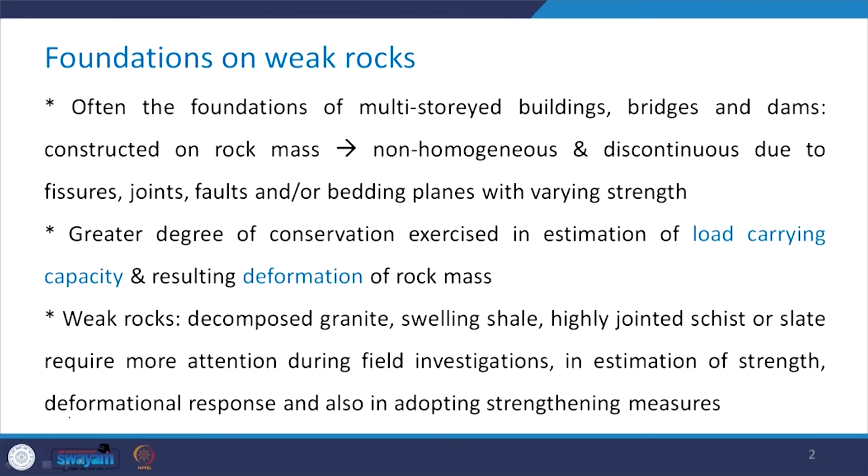Weak rocks can include decomposed granites, swelling shale, highly jointed schist or slate, and such types of weak rocks require more attention during field investigations in the estimation of their strength and deformational response, and also in adopting the strengthening measures.

Generally, bearing capacity of rocks is more than that of soils. So when I write here that bearing capacity of rocks is more than that of soil, that means I am talking about the bearing capacity of the foundations on rocks. They are more than the bearing capacity of the foundations on soils.

Compressive strength of this intact rock varies from 1 MPa to more than 200 MPa, and we have seen such things in detail in some of the earlier chapters of this course. You all know that due to presence of defects in rock mass, the compressive strength and the modulus of the rock mass is much less as compared to that of the intact rock.

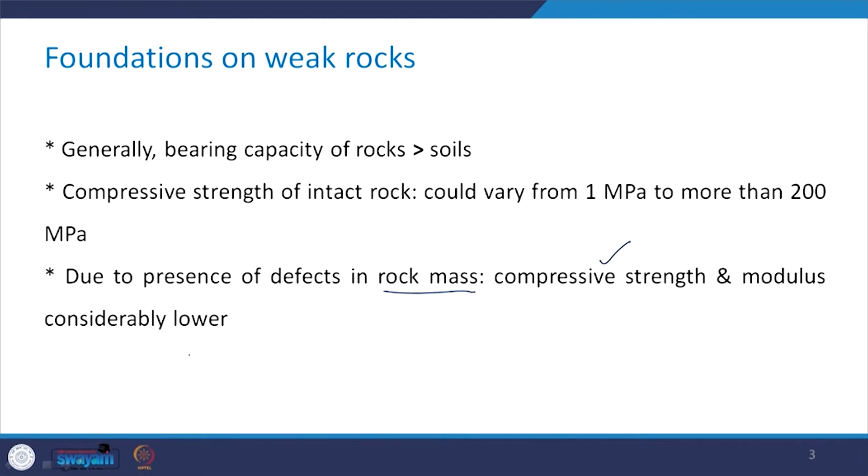Compressive loads from these structures, whether vertical or inclined or horizontal, have to be transmitted to the rock mass through individual spread footing or strip footing or mat foundation, or it can be caisson or pile shaft and its tip.

Suspension bridges, strengthening of dams, and in order to take care of uplift pressures in deep mat foundations for buildings in dry docks, these tensile loads are applied to the rock through anchors.

So you see that all the compressive loads are to be transmitted to the rock mass through these individual footings, which can be shallow footings or deep footings. However, in such cases where you have to take care of uplift pressures in strengthening dams or suspension bridges, tensile loads are applied to the rock through anchors.

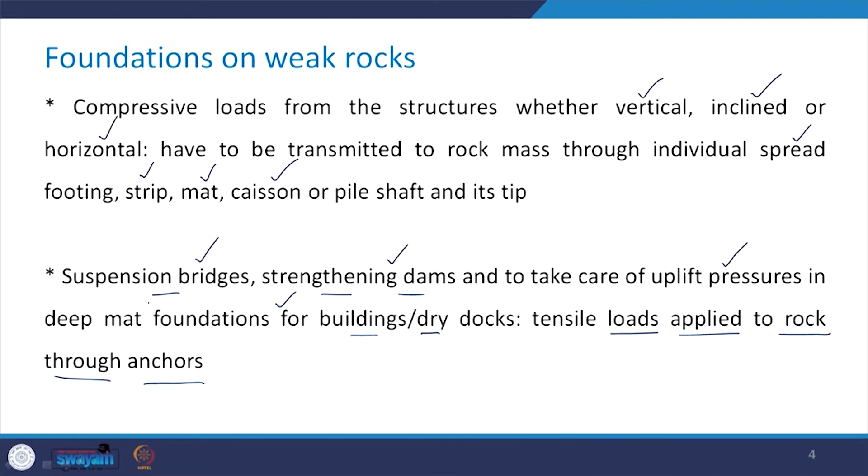Now, when the spacing of the joints is very wide, and by very wide spacing we mean spacing which is more than 5 times the loaded width, in such cases the bearing capacity of the individual footing or the pile tip can be estimated as that of an intact rock using the classical theories which we have in case of soils.

However, in case of heavily fractured rock with close spacing of joints—so you see in the previous case you had very wide spacing, and in this second case you are dealing with very close spacing of joints—this case can also be treated as a dense granular mass, and all the theories which are relevant in case of soils will be applicable in this case as well.

The main problem with the rock mass is the collection and testing of the large specimen in the lab or field in order to estimate their shear strength parameters, and we have seen all these problems when we were discussing the laboratory testing of rocks.

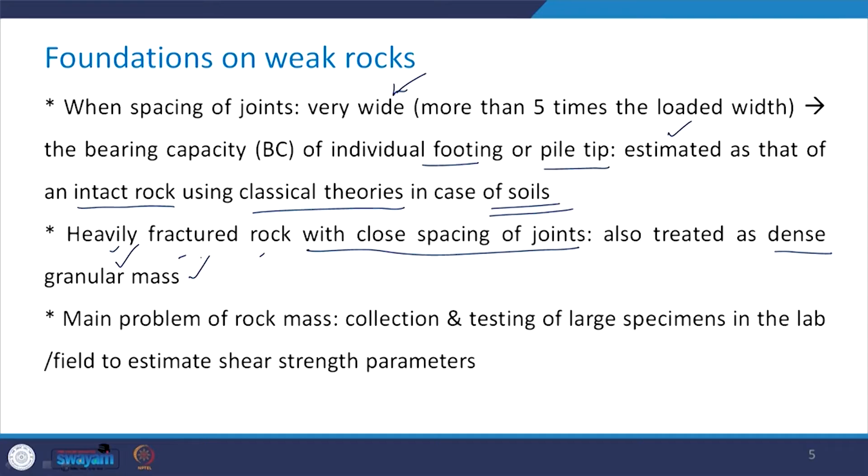It is really not possible to carry out some of these tests on the specimen of the rock mass, and you saw how we obtained the Mohr Coulomb parameters under effective stress condition by taking the help of Hoek and Brown parameters. Now, when the foundation mass is likely to fail in shear along a combination of 2 or 3 planes of weakness, the stability is assessed by considering the summation of shear strengths to the summation of shear stresses developed along all these planes.

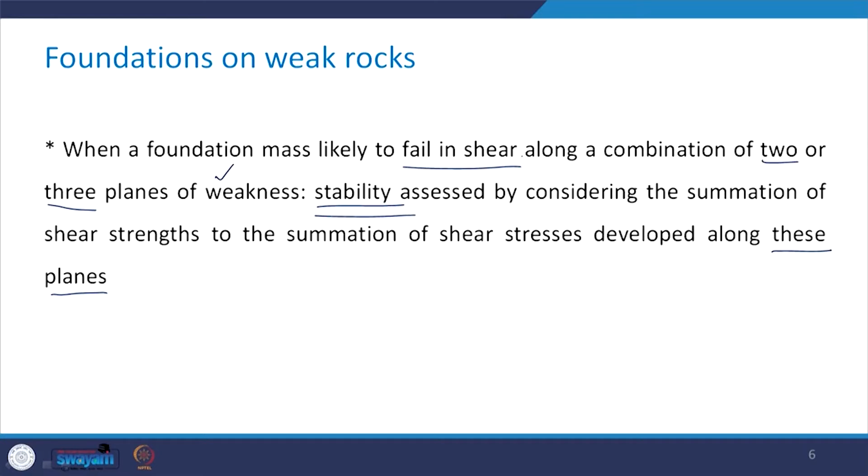Why do we say that stability is assessed by this? You are aware that when we talk about stability, we try to get the factor of safety. How do we obtain the factor of safety? It is basically the ratio of strength to the cause responsible for inducing that kind of failure. So if the failure is going to take place along more than one plane of weakness, we have to consider the shear strength and the shear stresses developed along all these planes when assessing stability.

Let me draw the basic modes of failure. The first mode of failure is the cracking mode. This is the ground level, and this represents the footing, and this is the ground level. In this mode, at these 2 points the cracks start propagating in this particular manner, and therefore the cracking takes place. These are basically the zones of tensile stress concentration.

In this case, cracks originate from the edges and propagate in the downward direction, as shown in this figure. So this is what is called the cracking mode.

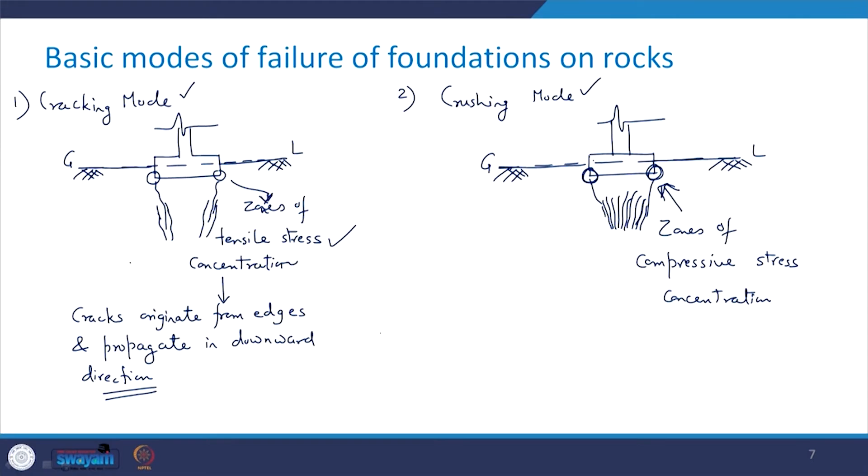So what is the difference between cracking mode and crushing mode? In case of the cracking mode, there occur zones of tensile stress concentration and the cracks propagate. In case of the crushing mode, these are zones of compressive stress concentration and the failure takes place accordingly. Then the third mode is the wedging mode.

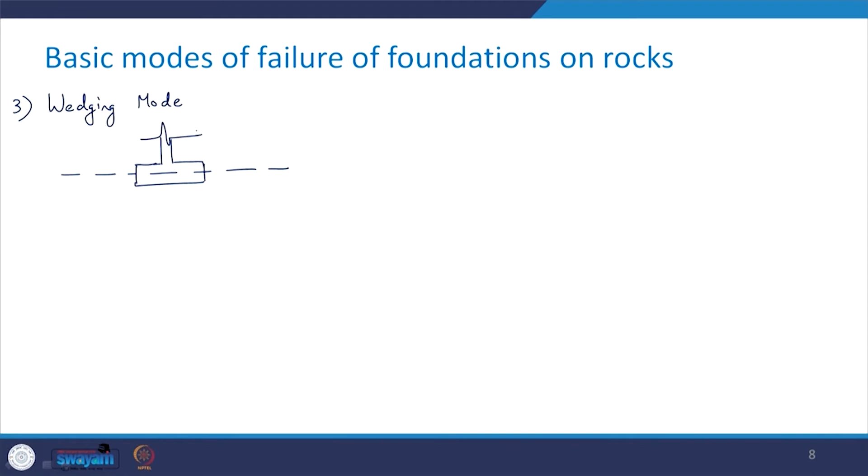As the name suggests, in this case there is formation of a wedge below the footing. So this is your footing, and this level is the ground level. There is going to be formation of this kind of wedge which will be extended on either side, and this is how at the center it is going to be, and on this side it is going to be this kind of shear which is developed. So in this case there is going to be the formation of a wedge.

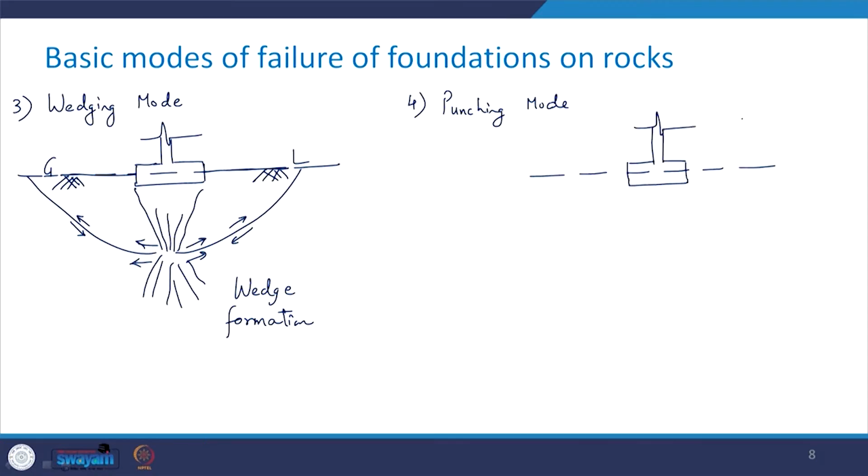The fourth one is the punching mode. Let us draw the footing once again. Ground level, and in this case you will have the punching, and here it will be in this manner, and you will have deformations like this. So in this case what happens is that the foundation undergoes...

...a sudden large vertical displacement, and this leads to collapse of voids or cavities. This is quite relevant in case you have limestone with solution cavities. So such type of failure mode is the punching mode.

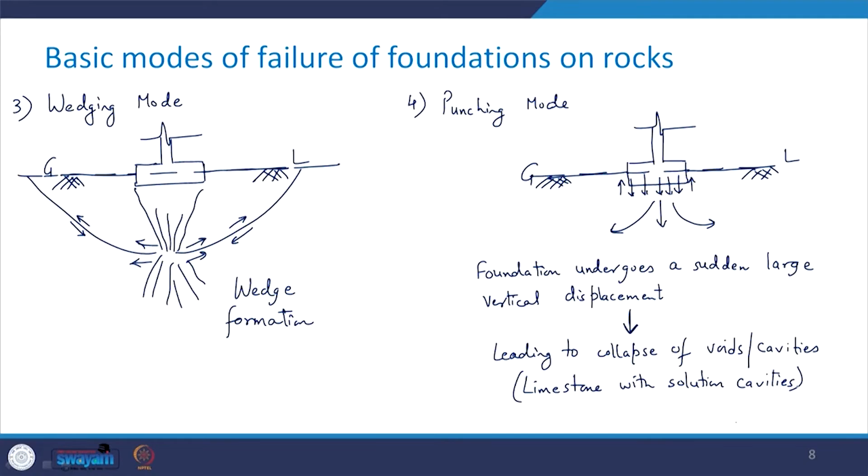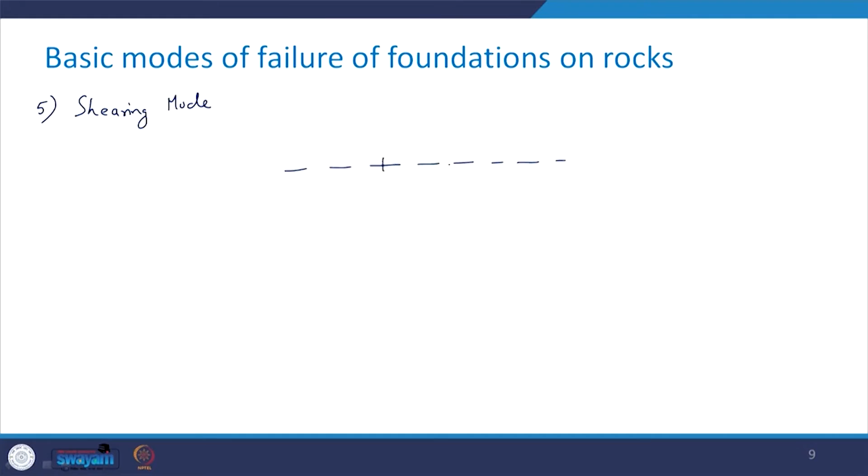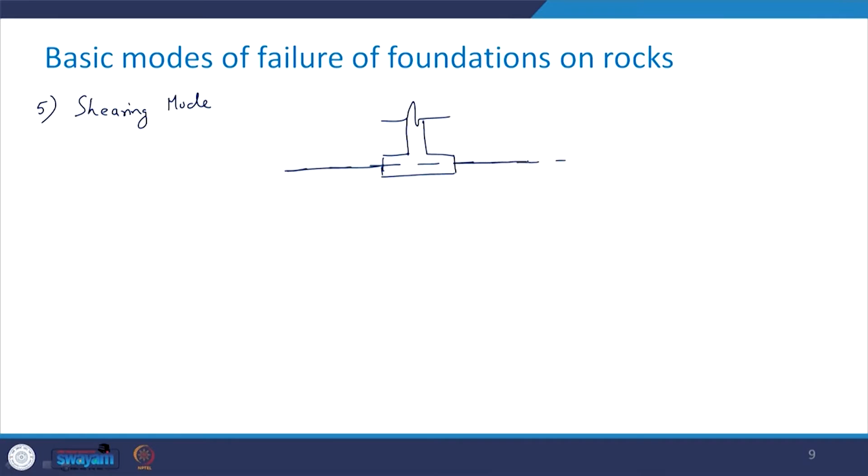Then the last in this category is the shearing mode. Let us have the footing once again. So this is your ground level and you are going to have this kind of situation. In this case, this leads to the shear failure.

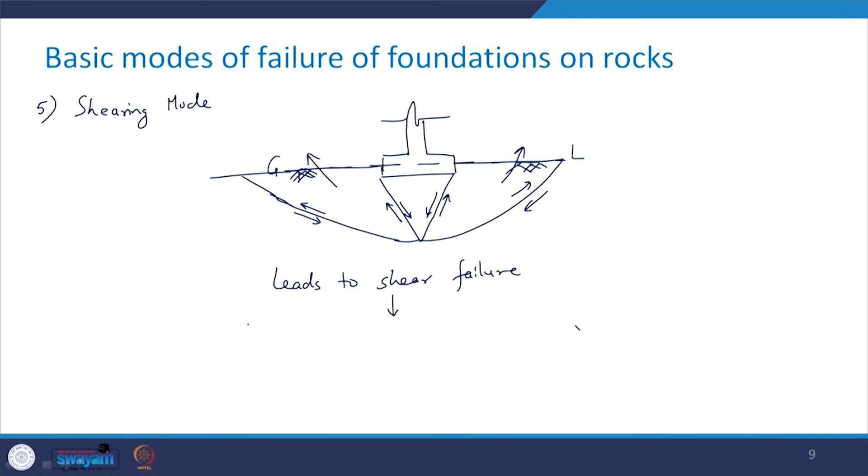This is prevalent in rock masses with very close joint spacing. So these are the 5 basic modes of failure of foundations on rocks: cracking, crushing, wedging, punching and the shearing mode.

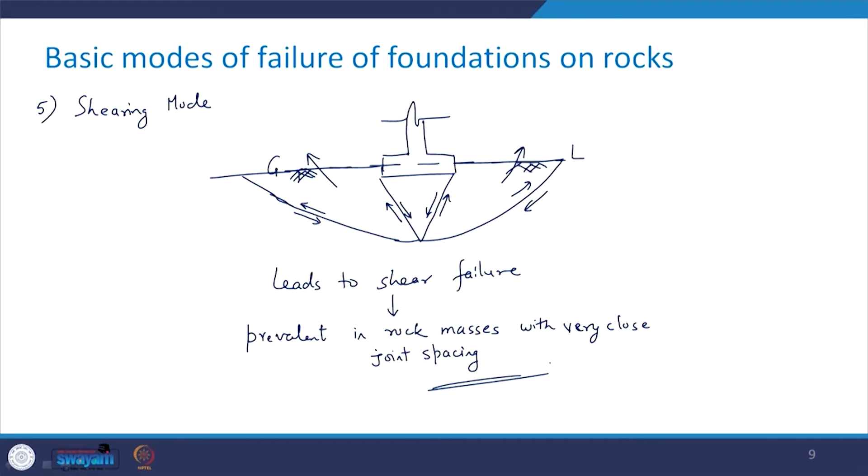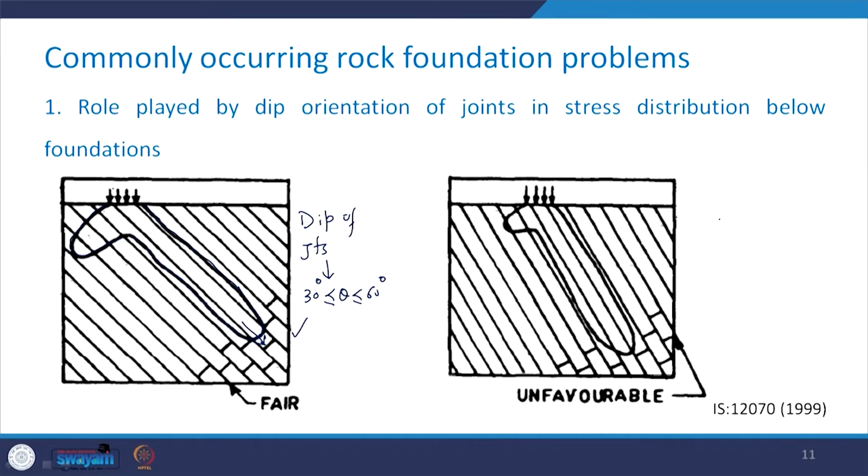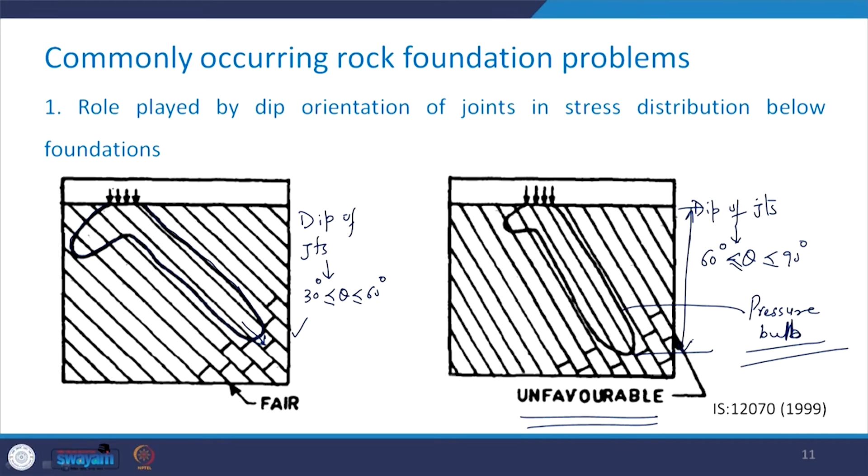So in this case the dip of the joint is between 60 degree to 90 degree, and you can see here that this is quite an unfavorable condition, and this is what is the pressure bulb in this situation. So as the dip of the joint is increasing, the depth up to which the pressure bulb is getting developed below the foundation is also increasing. So this is an unfavorable condition.

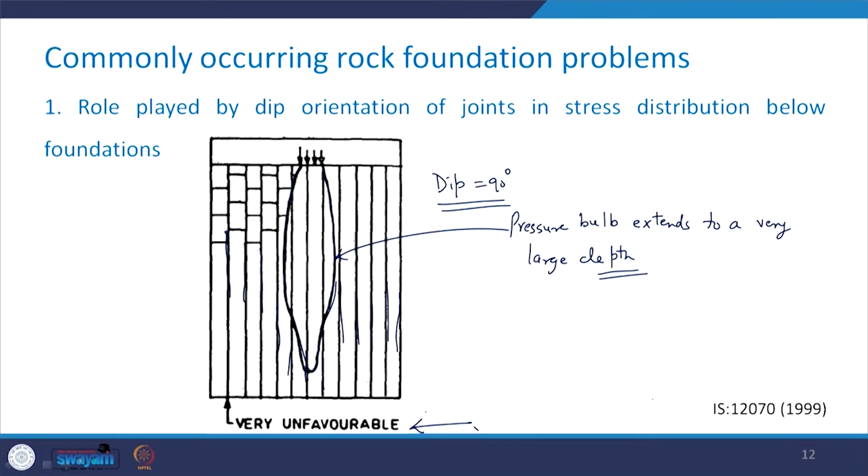And in this case, because the dip is 90 degrees, you can see that there are columnar joints in this particular manner. So this is the most unfavorable condition for the foundation to be resting on such type of rock mass. This is how the dip orientation of joint plays an important role in the stress distribution. You have seen that as the dip of the joint increases, the pressure bulb extends to a larger depth.

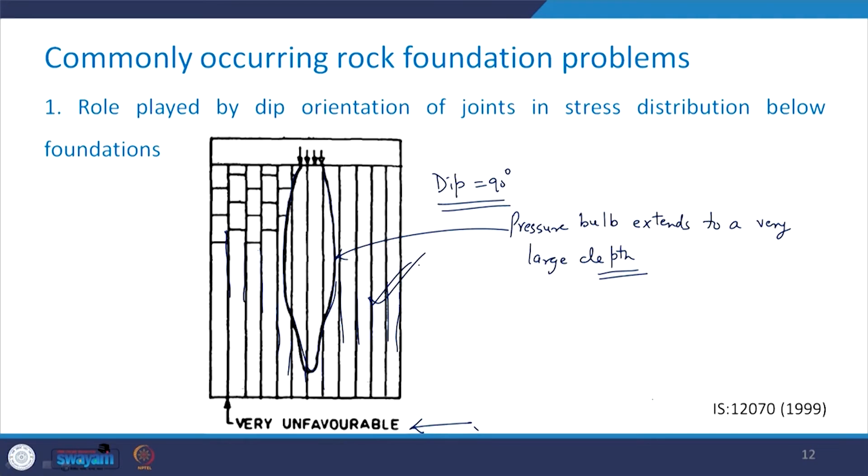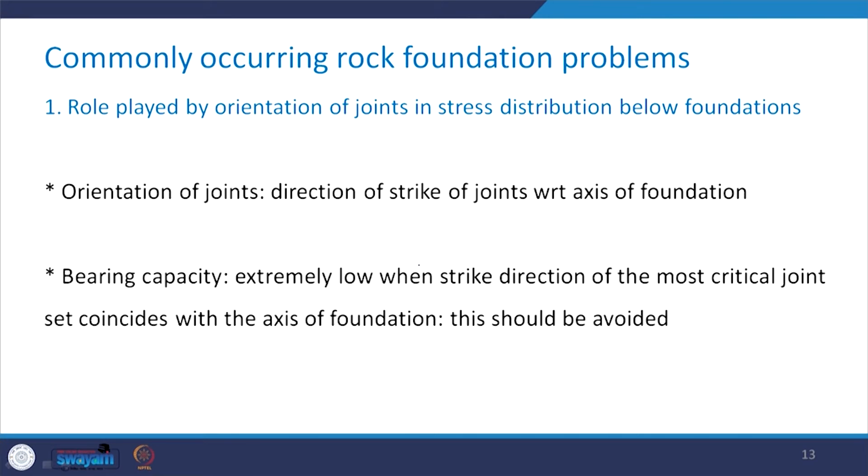Orientation of the joints is the direction of the strike of the joint with respect to the axis of foundation. Bearing capacity is extremely low when the strike direction of the most critical joint set coincides with the axis of the foundation. That we have seen as a very unfavorable condition, and this should be avoided.

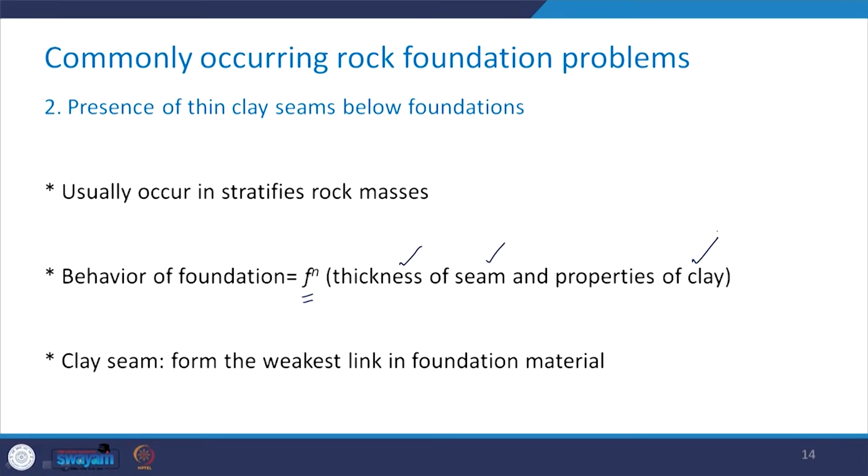The second commonly occurring rock foundation problem includes the presence of thin clay seams below the foundations. These usually occur in stratified rock masses, in which case the behavior of the foundation is a function of the thickness of the seam and the properties of the clay. This clay seam forms the weakest link in the foundation material.

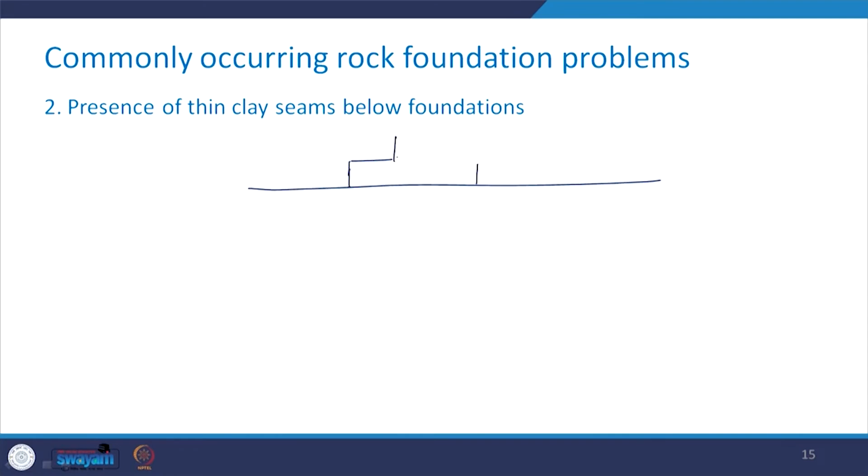Let me draw a figure and try to explain what we mean by this presence of thin clay seam below the foundation level. Let us draw this foundation first, say it is a surface footing for example. Now the load is transferred like this, and say here you have the joint sets, and on this portion here, this is what is your clay seam which is present.

So this is the clay seam, and along this you will have a shear stress, that is tau, and normal to this you will have sigma n. Now what happens when this clay seam is there? This gives rise to the failure of this clay material which is there in the seam if this tau is more than tau f for the clay.

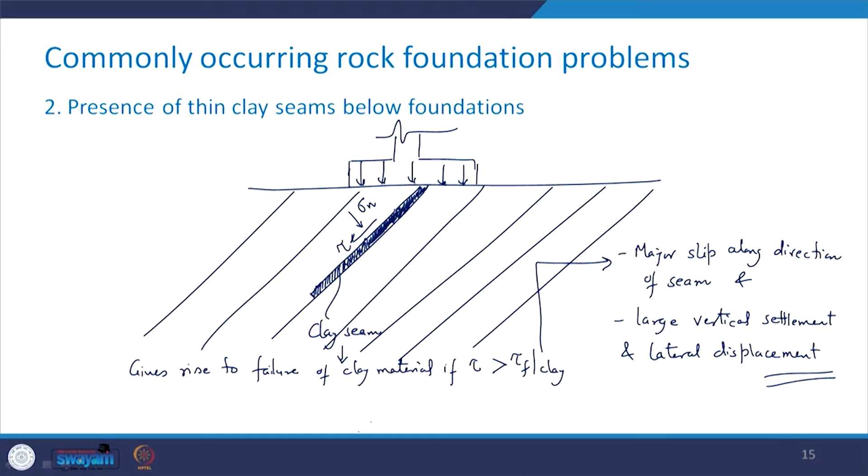Now what happens if such a situation is there? First of all, the major slip along the direction of the seam takes place, and large vertical settlement along with lateral displacement takes place, and this causes significant problems in case this clay seam is present below the foundations.

Another commonly occurring rock foundation problem includes the presence of shear zones below the foundations of major structures like gravity dams, arch cum gravity dams, nuclear reactor buildings, and large diameter silos. Let me try to show you with the help of a figure, in case of a gravity dam, where there is a presence of the shear zone.

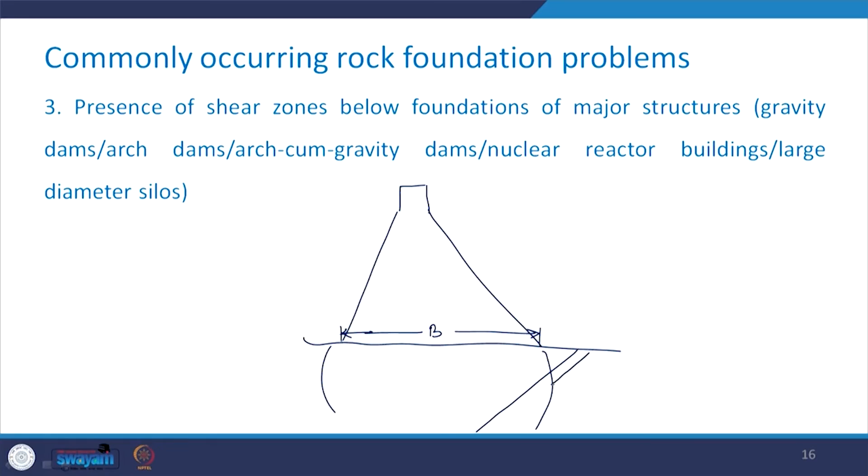Say the width here at the base is B. Obviously the pressure bulb is going to be there, and say there is the occurrence of this shear zone, like this. So again here you will have the shear stress and the normal stress, that is sigma n. This is what is your rock mass.

Now there is going to be the presence of the vertical as well as the horizontal force, and say that the horizontal force is H and the vertical one is V. So this H would include the hydrostatic pressure plus the silt pressure plus the wave pressure, or there can be the presence of seismic pressure. Because of that also this horizontal force can be caused.

If the tau in the shear zone, which has been shown here, is more than tau f, what is going to happen? There is going to be very large displacement of the body of the dam.

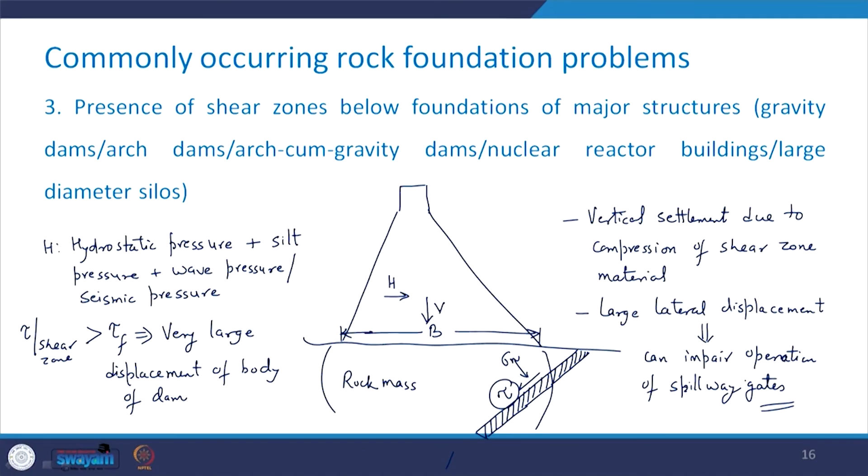And this can impair the operation of spillway gates, which are an important feature of any dam structure. So this is how the presence of shear zone is going to create the problem for the dam foundation case.

Coming to the fourth one, in case if you have the presence of the geological faults or fault zones, then also it creates problem related to the foundations which are to be founded where such geological structures are present. Let us try to have a look at how this influences. So say this is your ground surface, and here you have the fault. And in the neighboring region, I have the fault zone.

So this is what is the fault, which is the open fracture, and this one is the fault zone. So what happens in case of the fault plane? It is the fracture plane which propagates through the body of rock mass, like it has been shown here.

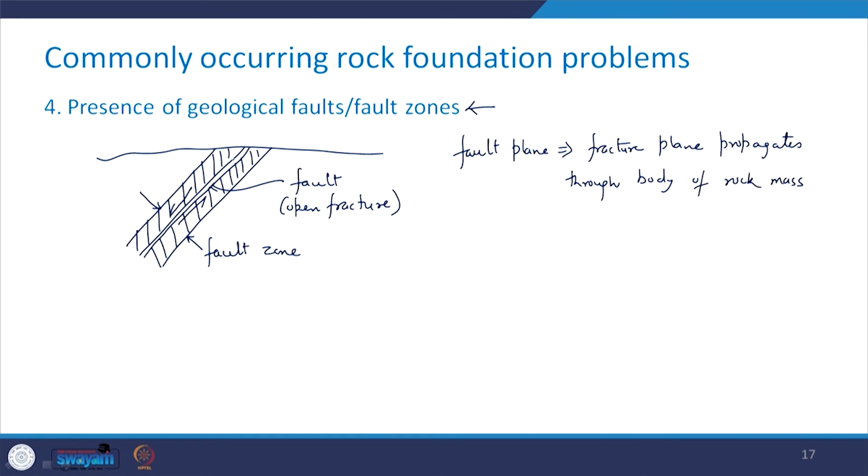Now what happens with the passage of time? This rock, or the rock mass which is present on either side of this fault, gets weathered. And because of this, there is going to be major shear displacement.

Crushing or the shearing of the weathered rock mass takes place because of this major shear displacement. And this causes the formation of fault zone, which has been shown by the shaded portion in this figure.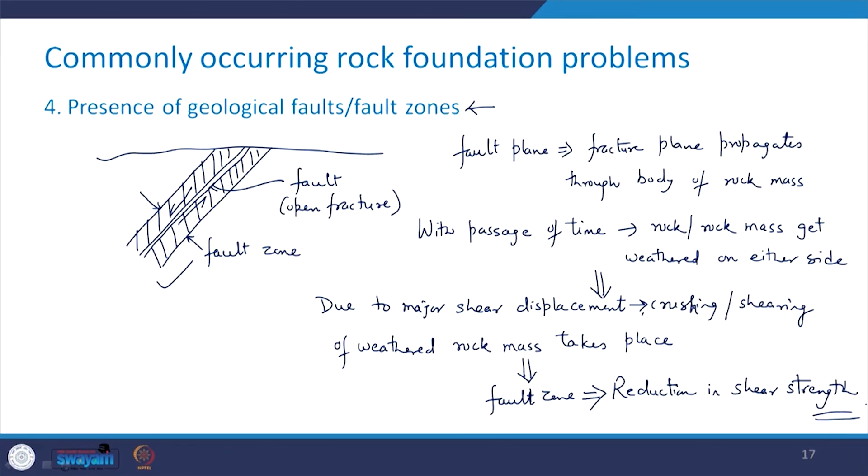Then the saturation of the rock strata again creates problem because it drastically reduces the strength, and it gives rise to the problems of low bearing capacity, differential settlements, tilting or the cracking of the structure.

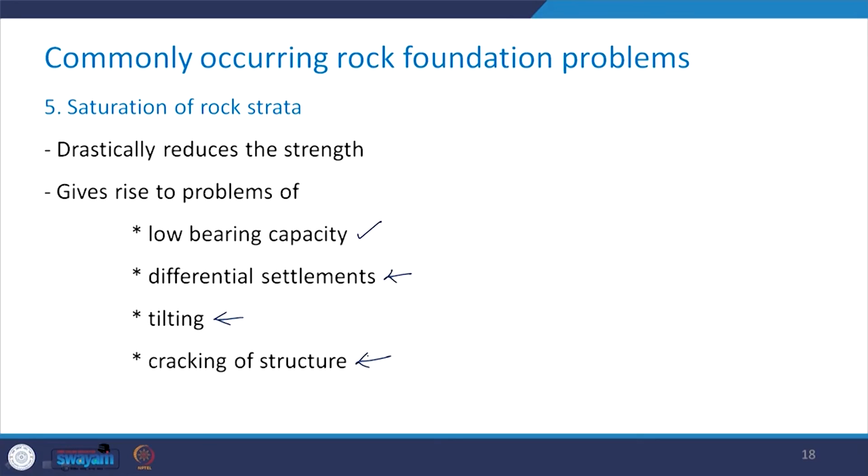Then in case if you have the foundations on slopes or foundation in the hilly terrain, these are associated with slope stability problems. So these also create the problems for the foundations.

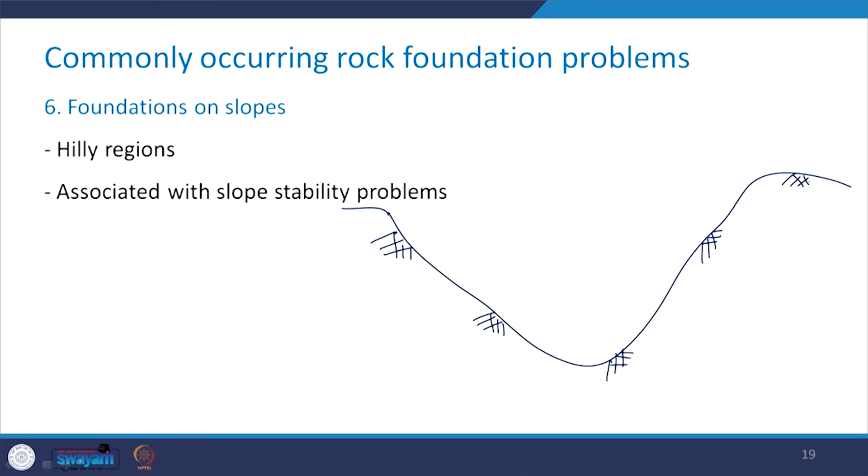So let us say that this is how the situation is here. This is what is your ground surface. And say here you have some kind of a structure that is going to come up, and for that structure here is the foundation system.

So say this is what is the tower, and then you will have here as the anchor block, and say here you have the river. Some superstructure is there.

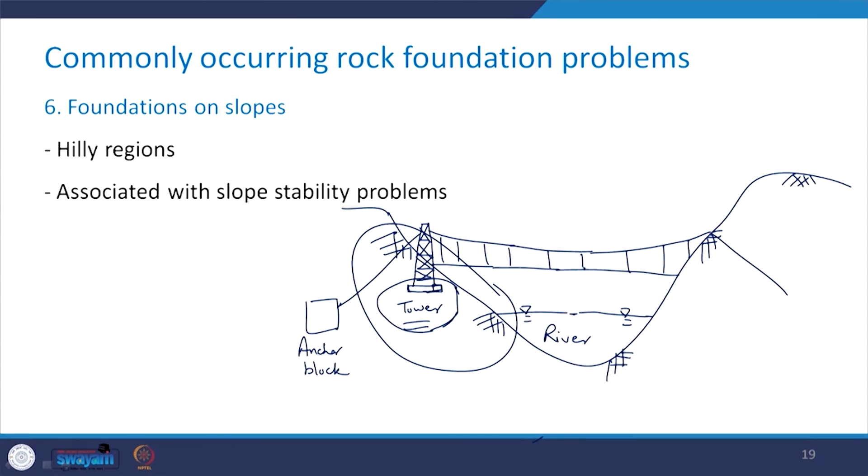So you see that whatever are the foundations for this tower, they would be treated as foundations on slopes. So there we need to be careful that this slope itself should be stable, and all those problems which are associated with the slope stability issues, they are going to be the problems here in case of the foundations for, let us say, this tower structure.

So in case if the foundations on slopes are there, they also create these problems for the foundations on the rocks. So these were some of the common occurring type of the problems that may occur.

So having this background of the effect of the joint orientation and the other associated problems related to foundations on rocks, now we are ready to learn how to determine the bearing capacity of the foundations which are to be constructed on the rocks or rock masses. So that we will take up in the next class.